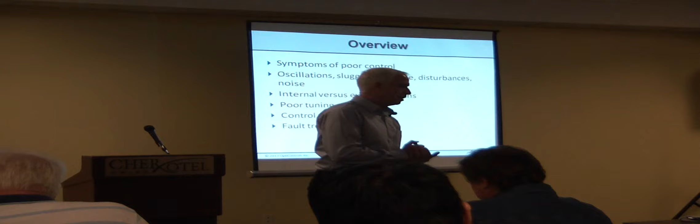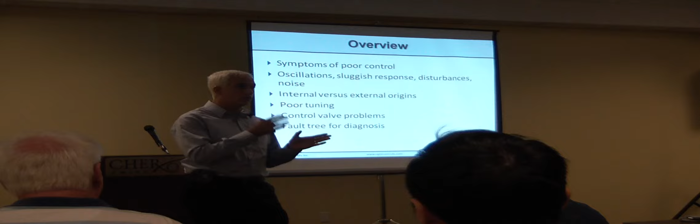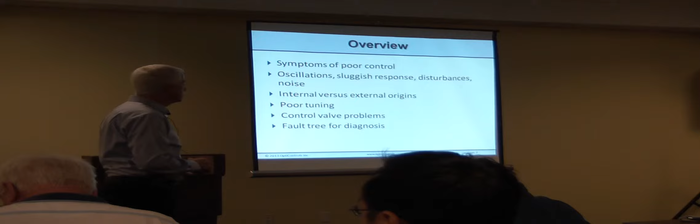So that's exactly what I'm going to target here. I'm going to talk about problem control loops. I've been doing this for a long time, and if we apply the 80-20 rule, we can come up with just a few problems that occur very commonly amongst different control loops. The loop doesn't perform well. Why doesn't it perform well? Well, because it's oscillating due to friction or whatever the case might be. So I'm going to go through a kind of fault tree here to talk about the different control problems and how to solve it.

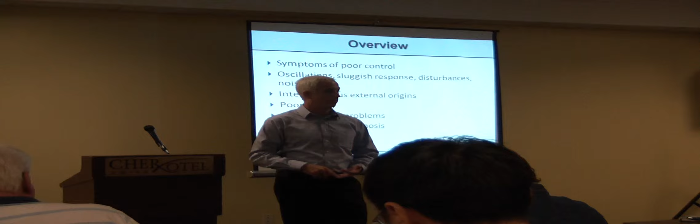I'll start off - this is not really in sequence, it's more topics that I'll cover as I go through the presentation. But I will talk about symptoms of poor control, various symptoms. I'll be talking about oscillations, a very common problem. Sluggish response from control loops, where the loop just doesn't get back to set point as quickly as you want. Large disturbances, noisy control loops.

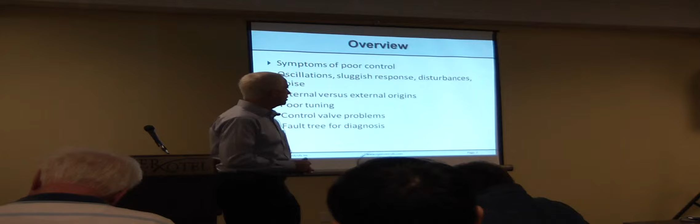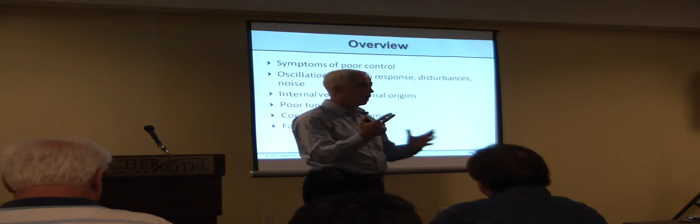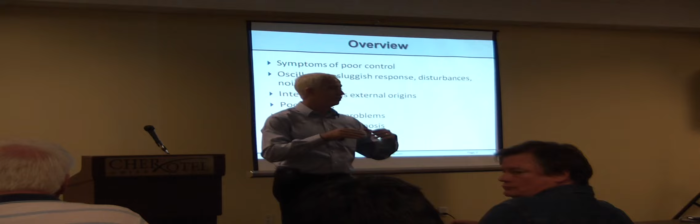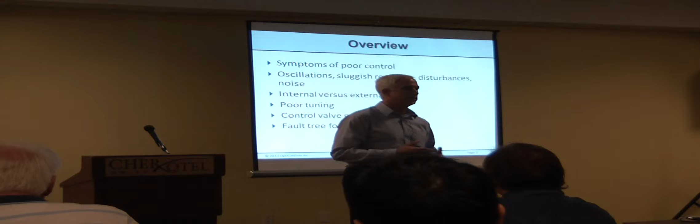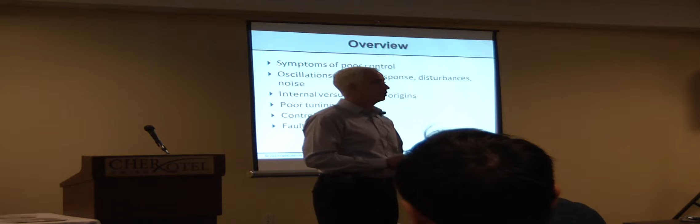We'll start at the top and kind of work our way down here. So I hope that you'll walk away with at least a few ideas of how to attack some of your poorly performing control loops. I'll make the presentation available to the ISA section afterwards - they said they posted it on the website somewhere. But also I have a sheet at the back where, if you would like a copy of the presentation, just leave your email address and I'll email you a copy.

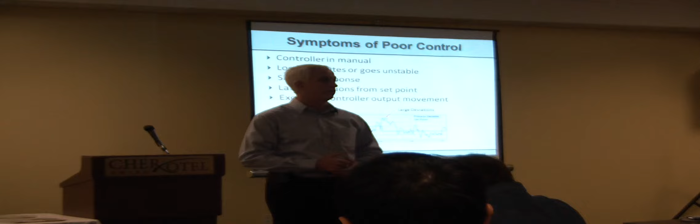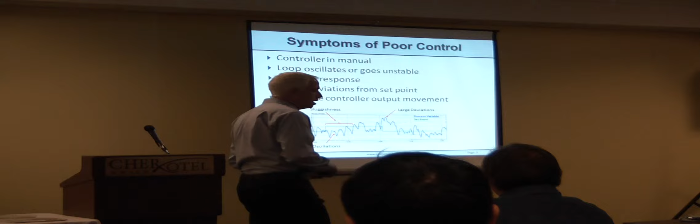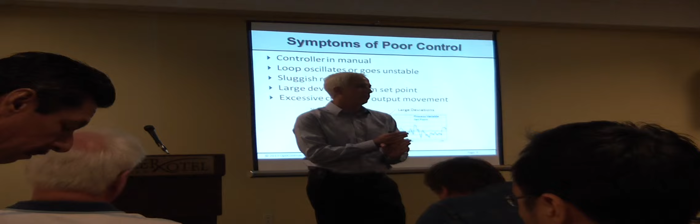If you have any questions while I'm talking, that's fine, just go ahead and ask. If there's something that I didn't explain properly, there's probably a few other people in the room that had the same question but just didn't want to ask it. So we'll start off by looking at symptoms of poor control. Basically, poor control is when you have unacceptable deviations from set point. If the control loop stayed on set point, who cares if it's not tuned properly or if the valve is working properly - but what we're talking about is loops that deviate from set point unacceptably, and you'd like them to stay on set point much better.

Many of these loops are so problematic that the operators go and put the loop in manual control. They find that when it's in auto, the loop is actually worse than what it is in manual. So you'll find a couple of loops in manual that are performing so poorly. Other loops may oscillate, they may go completely unstable. The valve might be hitting into the bottom limit or the top limit of the control range. The loop might just be really sluggish - a disturbance hits the process, and man, this loop just doesn't get back to set point as fast as you'd like. There may be really large deviations from set point. Also, you'd like to stick closely to set point because it's critical for the process, but your process just doesn't stay at the set point. You can also have excessive controller output movement.

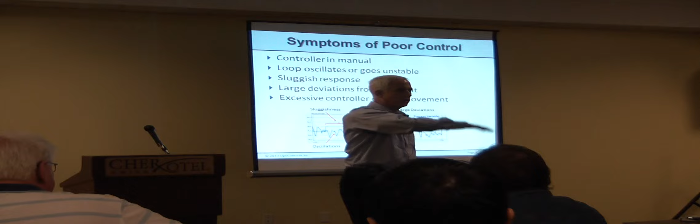The valve is forever opening, closing, opening, closing. It may be that we're keeping the process to set point, but we're creating havoc in this downstream process with the valve opening and closing the whole time.

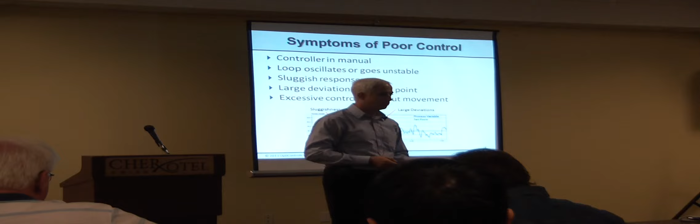So various symptoms of poor control, and we'll take an in-depth look at each one of these symptoms and what could be the causes. What I'll use there is this problem analysis tree. We'll start at the top, controller manual, and so on, and work our way down.

The control loops in manual. Some loops are fine—they're part of the process that we designed. It's a redundant pump with its own little flow loop, and that loop being in manual is fine. We're not talking about those loops.

We're talking about loops that are in manual that are really supposed to be running in auto. So take an audit, you get a list of loops that are in manual, and you weed out the ones that are supposed to be in manual, and you end up with the ones that should be in auto.

Now, the operator would normally be able to tell you why this loop is in manual. His explanation might just be, well, it doesn't work in auto, which doesn't help you much. Or he may be able to tell you exactly why it doesn't work in auto, in which case it helps you. Typically, you have to go back and review historical data for times where this loop actually was running in automatic control, so you can see what the problem exactly was.

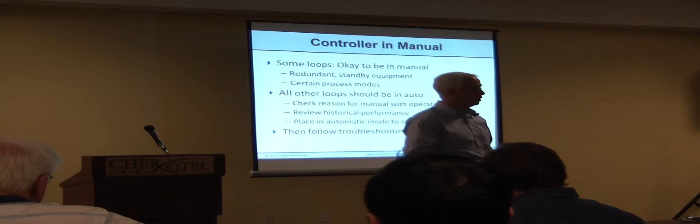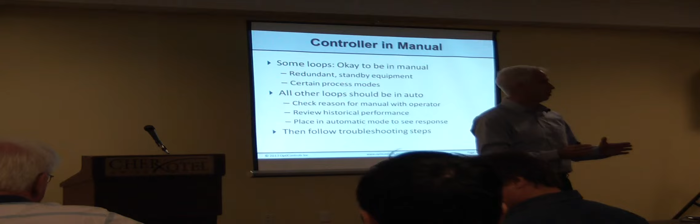Or alternatively, you can ask the operator to put the loop in auto so you can see exactly what the problem is—you can always put it back in manual. Put the loop in auto to see what the problem is—you can always put the loop back in manual. But once you see what the problem is, then we can go down the rest of this fault analysis tree and find out exactly how to solve this problem.

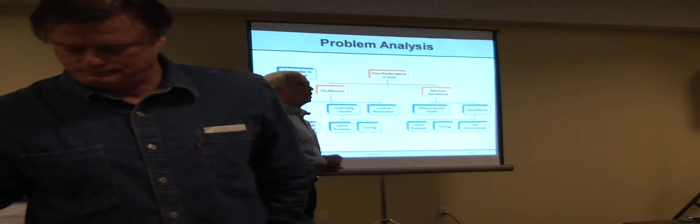So we assume we put this loop in auto, or it's been running in auto all along, and we have to differentiate whether the deviations from set point we have are oscillations, because there's a whole different fault tree for them, or if they're random deviations from set point, in which case we'll take a different path down the tree. The differentiation there is pretty easy, but it's a very important differentiation because it'll take you on a different path.

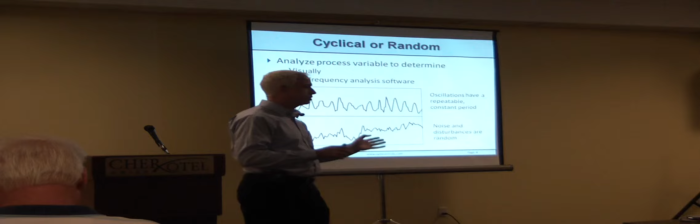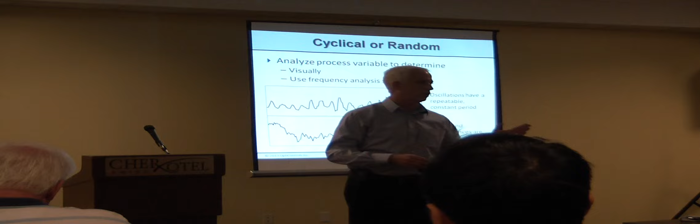Now, some loops have a little bit of oscillation and a little bit of randomness to them, and you might have to follow both of these patterns eventually to get the loop performing properly. But here you go: oscillations, periodic—you can use some software to do a power spectrum analysis and so on, but you can normally just look at a loop and see, well, is this a persistent oscillation, or is it more random?

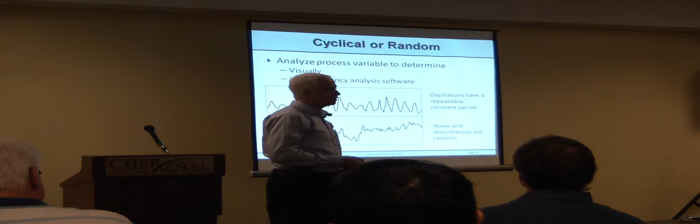We'll take the example first of an oscillation. So we'll say, well, this loop is oscillating—I spend a lot of time looking at control loops at plants, and you guys should probably know also that oscillation is really one of the big problems that you have. There are many, many control loops out there that do oscillate. I'd say, of problem loops, maybe a 4-to-1 ratio that, well, this loop is oscillating because of some reason. So oscillations are a severe problem in control performance.

Now, oscillations can have various causes. It could be externally caused, meaning it's not really coming from within the loop. It could be internal, the loop itself is causing itself to oscillate, or kind of a combination between the two, a cyclical interaction.

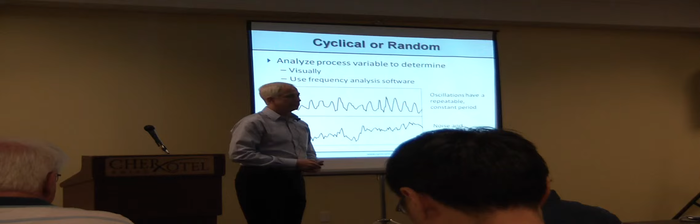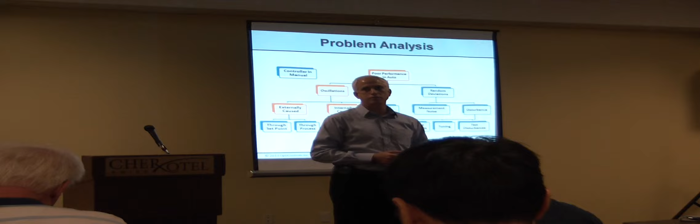So first of all, we need to differentiate if it's an externally caused problem or an internally caused problem. If it's external, we're going to go find it somewhere else. If it's internal, well, we're at the loop, it's oscillating, we're right there, we can work with the loop. How do we differentiate between an external problem or the loop itself causing the problem?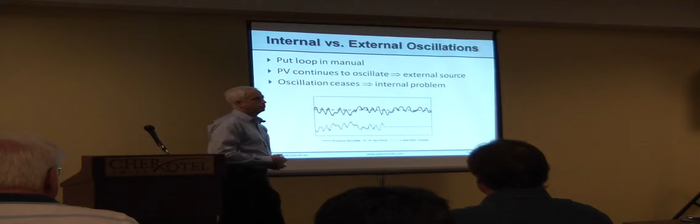Well, surprisingly high-tech answer: put the control loop in manual and see if the oscillation stops. If the oscillation continues, then it's not this loop causing the oscillation. That's pretty clear. So we put the loop in manual, the oscillation dies out - well, it's probably this loop.

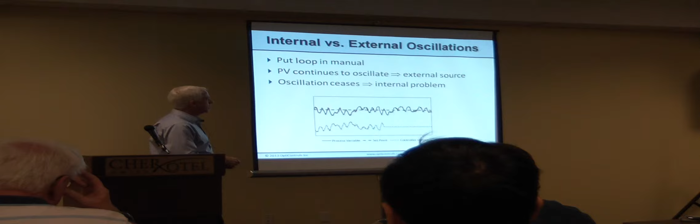There's one alternative to that I'll get to later. But if the oscillation persists, well, then it's somewhere else, and we've got to go find where the oscillation is coming from, and then go fix it at that particular control loop.

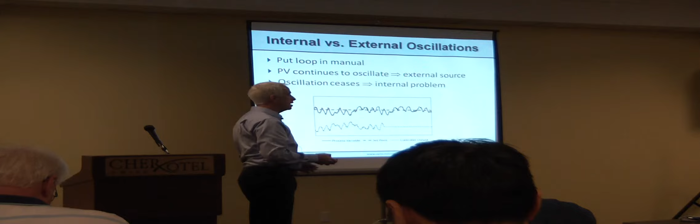So if it's externally caused, it could be coming into the loop through the set point, or it could be coming into the loop from the process side. If we put the loop in manual and the oscillation persisted, we've got two options there: through the set point or through the process.

Now, through the set point it might seem easy. We take a look at this loop - it's oscillating, is its set point oscillating? Yeah, set point's oscillating, so it's obviously coming from the loop driving the set point.

But not always - there's one exception to that. If we look at this cascade control arrangement, the flow loop is oscillating, let's say, and the temperature is oscillating. The set point in the flow loop is actually oscillating. So we're thinking, well, the flow loop isn't causing it because the oscillation is coming into the set point. But that's not always the case.

If we have a sticky control valve here, and this loop is trying to get to set point, in the meantime, this temperature is not on set point. So we get some reaction from the temperature controller. And when this valve slips to the new position, the temperature gets affected, and it may look like the temperature loop is causing that oscillation because it's coming in through the set point, but in fact it's not - in fact it's inside of this loop.

So we have to find out if the oscillation actually comes through the set point, or is it just a result of poor performance in this loop. And again here, the test is quite easy.

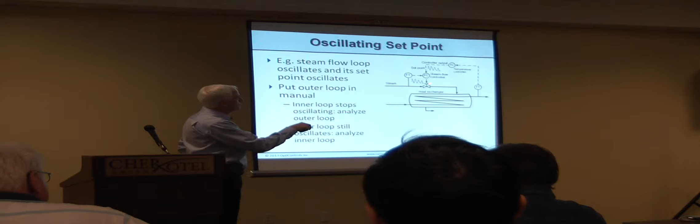We take the temperature controller and put it in manual - or the external one, in my example the temperature controller, but it could be anything else. We take the primary loop in the cascade arrangement, put the controller in manual, and then see if the secondary loop still oscillates. If this was a sticky control valve, like in my example, this loop would continue to oscillate, so we can put the temperature controller aside for now and just focus on the inner loop.

So oscillation coming into the set point - it's not necessarily coming into the set point, so just know about that.

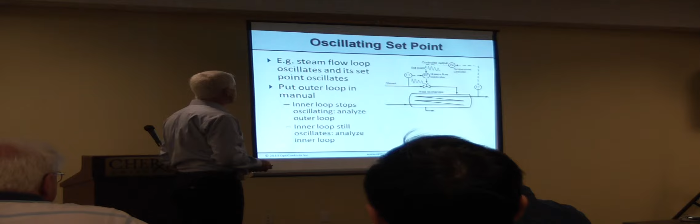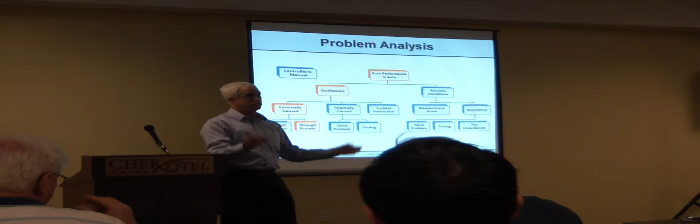Assuming it's not coming into the set point, it may come into the process. So we've got this loop, it's oscillating, we put it in manual, it's still oscillating. The whole process is oscillating. There may be 4 or 5 loops oscillating at the same time. These are difficult to track down. We may have this loop here somewhere that's oscillating, causing half of this process to oscillate, and we have this critical loop down here that we really want to stabilize, but the whole process is oscillating.

How do we know where this oscillation is actually coming from? There are software tools available that help you run this analysis. I have some experience with them. It surely does not replace an engineer - you've still got to understand your process, you've still got to do your own analysis and so on. It's just a tool, it makes it a little bit easier for you.

So there's software available to help you, but quite often you've got to look at your process flow diagram, use a process historian, take a look at which loops are actually around this process, which loops are oscillating, which loops are stable, and then how do they feed into each other process-wise?

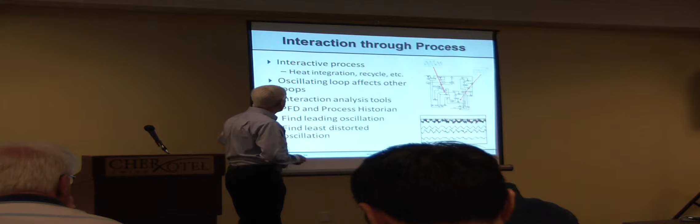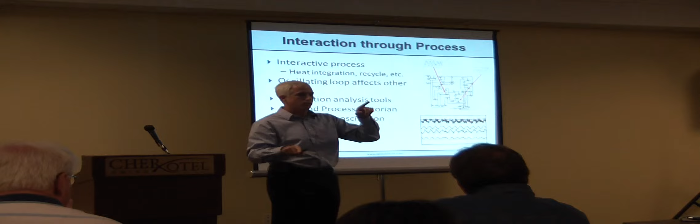How do they feed into each other? So a few things you can do is look for the leading oscillation. We have a bunch of loops that are all oscillating, and we don't know which one is actually starting it. We can look at the leading one, the one that peaks first before the others peak. We might have 5 loops oscillating, this one peaks first, then this one, then this one, then that one. So it's likely to be the first one.

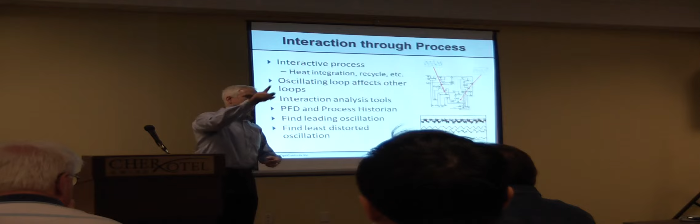A little difficult though is the cyclical oscillation, because then you're just chasing your tail.

An additional piece of information is you can take a look at the distortion on the trends you're looking at. Distortion means how closely does it look to a recognizable signal? Does it look like a sine wave, a square wave, or a triangular wave? Or is it just really messed up and noisy? The closer the loops are to the source of the oscillation, the less distortion there will be on the signal.

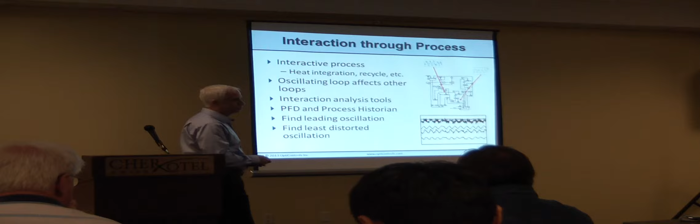So just for an example here, we have a bunch of loops oscillating, and this triangular wave seems to have the least distortion on it. So that's likely the loop I'll be looking at first. Okay, so you can look at the leading oscillation, leading peaks, and look at all the distortions.

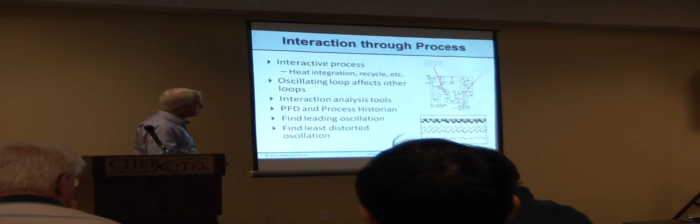Use a process historian or process interaction analysis software to help you with this. That's to pin down the problem. Eventually we'll end up with the control loop that's actually oscillating.

Right, so now we've tracked it down. This loop is the problem, and we now have two options. It's in the loop itself. Sometimes it may be the transmitter, but most of the time it's not. Most of the time it is either the tuning on the controller or it's the final control element - valve, damper, may even be a variable speed drive.

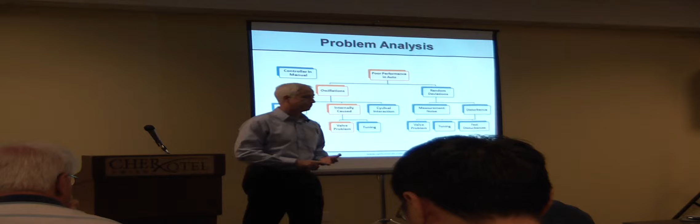First problem, very common problem, is sticky control valve. This valve doesn't slide very well. It sticks whenever the controller just hesitates for a moment, the valve sticks in place.

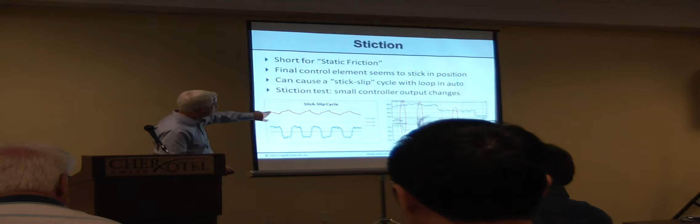Then what happens - so it may stick. We're looking at the set point, the green line here, and the process variable, the blue line. I think it's a flow loop. So the process is above set point, and the controller works its way down, trying to close the valve, trying to get the process to set point, but this valve is sticking in place, so the valve is not actually moving. It's just the controller output that's moving.

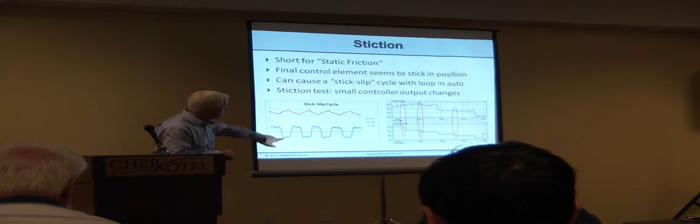And it's building up additional pressure on the diaphragm of the valve, but the valve's not moving. Eventually the pressure gets so much that the valve slips to a new position, but now we have excess pressure in there, so the valve overshoots its set point, the process overshoots its set point, and the whole thing just reverses direction. Now the controller sees we're below set point, has to work the other way - so we find this stiction. You can look at the shape of the controller output.

The controller output normally looks either triangular or more like a sawtooth, as in this case. The process variable is either a square wave or also maybe something like a sawtooth.

You can also do a stiction test in manual. Put the control loop in manual and then make small changes in the controller output. Change it down by preferably 0.5% at a time, depending on how tightly you want the controller to be. Make small changes in the controller output and make sure that the process variable, the flow rate, actually moves every time you move the controller output.

In this example, we move the controller output. This is quite an extreme example, but we move the controller output down, the process did nothing. Move the controller output again, the process did nothing. Move the controller output again, now the process responded.

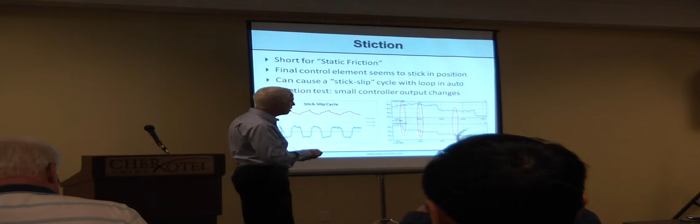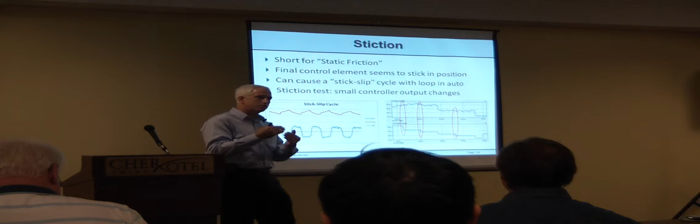So it could be deadband, but if we carry on with this, we'll see the stiction. If we move the controller again, the process doesn't respond; move the controller again, the process responds. So with these successive controller output movements, we're building up pressure, the valve doesn't actually move, and then the valve moves. Building up pressure, the valve doesn't move, then the valve moves. If this is the case, you really can't fix this with tuning - we really have to address that problem at the valve.

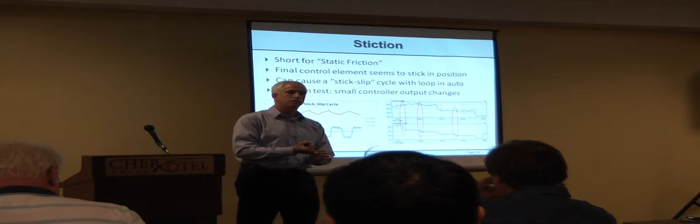It may be that the valve packing has been overly tightened, and so it's sticking. You might want to untighten the packing. Maybe the packing needs to be replaced. Maybe the positioner is faulty. Maybe the actuator is undersized.

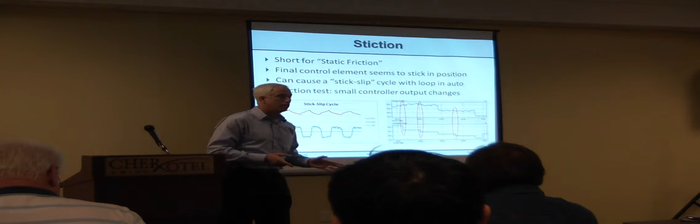So various problems there that can be causing it, but it's not a tuning problem. The bad thing would be to see this oscillation and think, okay, this loop is oscillating, I'll fix it with the tuning.

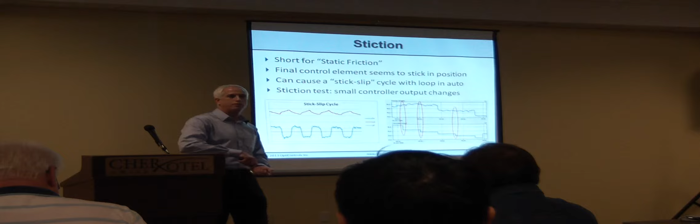So you go to detune the controller a little bit. The oscillation looks maybe a little better. Detune the controller further, and eventually you detune it so much the oscillations stop and you're happy. But now you have two problems.

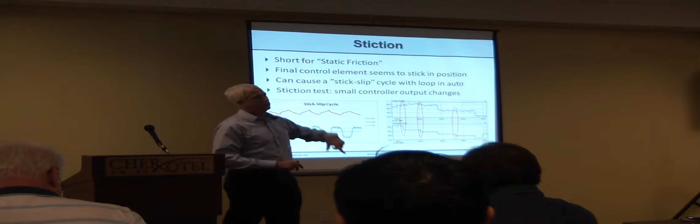One, you still have the sticky control valve, and you have the severely detuned controller. So we're going to test for stiction, identify stiction, and fix it at the control valve, not with tuning.

When I started in this game, positioners weren't very common. Nowadays, almost all valves have positioners on them. Positioners also have their own problems.

Now you have a positioner working like that, and you have a controller that's tuned quite aggressively. The two begin hunting against each other, and this loop starts oscillating. So check for positioner problems too.

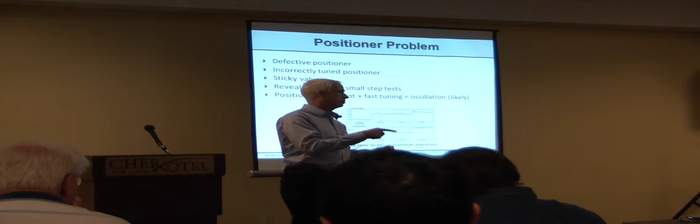Positioners have tuning settings. They need to be calibrated properly. Some positioners have auto-tune, I guess many of them, but nowadays the digital ones all have auto-tune. But it doesn't always give you the right result. Run auto-tune twice and see if you get different numbers. You'll be surprised.

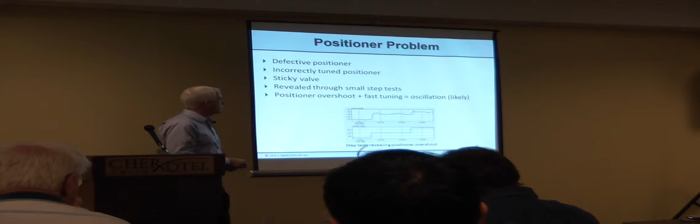Again, it's a positioner problem, so we've got to fix the problem at the positioner and not with the tuning of the controller. Valve sizing.

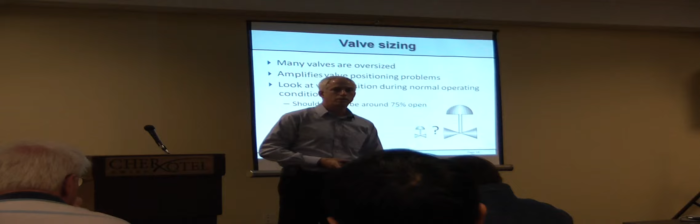Just earlier this week, I was helping a company that had a pressure control problem. The control valve, which was supposed to control the pressure, was operating between about 5% and I think 12% open. That was about the range of the valve. So that valve is about 8 times oversized.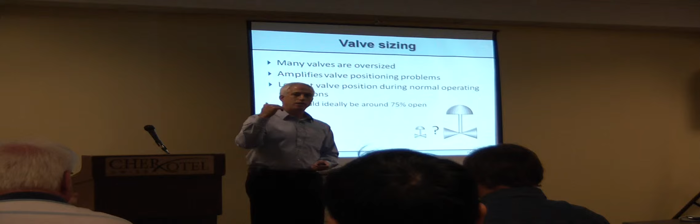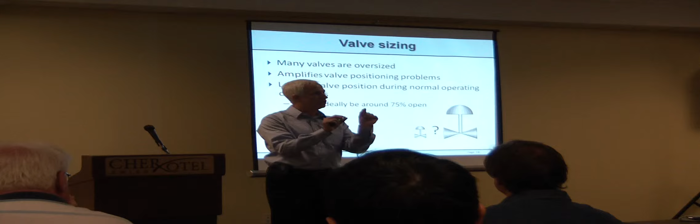It's just running at a fraction of its range, which is theoretically not a problem, but practically it's a problem because you can't change the valve position in infinitely small increments. You're lucky if you get like 1% or 0.5% resolution out of the valve. So let's say we got 0.5% resolution, but the valve is 8 times oversized, so that effectively is a 4% resolution on the process we're trying to control.

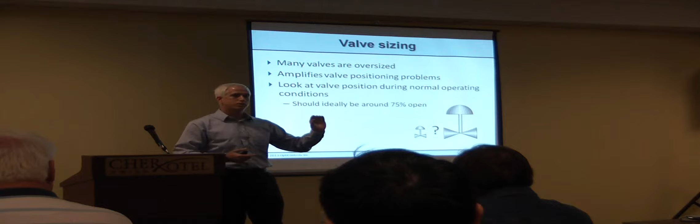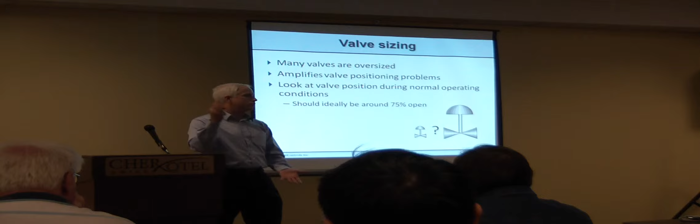And in this company, it wasn't good enough. The loop was oscillating. So be sure that your valves are sized right. You can spend a lot of time trying to tune valves, replace them, and get rid of stiction, but if the valve is oversized, that's not the right solution, or not the only solution you need to look at. You also need to look at replacing the trim in the valve to get it sized properly, or replacing the valve.

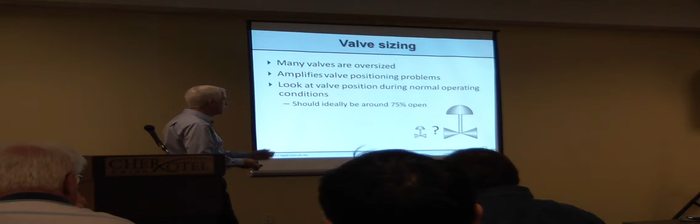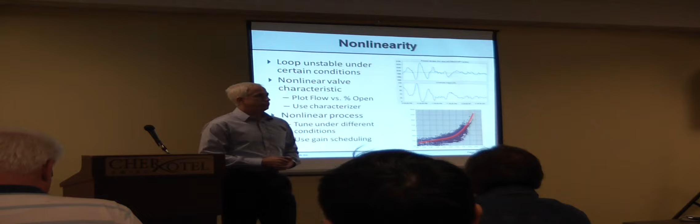Another problem, non-linearity. Got an equal percentage valve. It's a flow loop, a flow application, so we put an equal percentage valve in there. But do you really need an equal percentage valve? Not all loops need equal percentage valves, even if it's a flow loop.

So we end up with this flow characteristic, which is not linear, and we end up with a controller that's kind of sluggish at low flow conditions, and almost out of tune under high flow conditions.

So you've got to use a characterizer then, or change the trim in the valve, or change the valve to get a linear installed characteristic. A characterizer is pretty easy to implement.

You can also have nonlinear processes like pH. When you control pH, it's a very nonlinear process. A single controller gain is not going to work all the way through your pH range, so you have to do some gain scheduling to adjust your controller gain depending on what the pH is.

Can you expand on that a little?